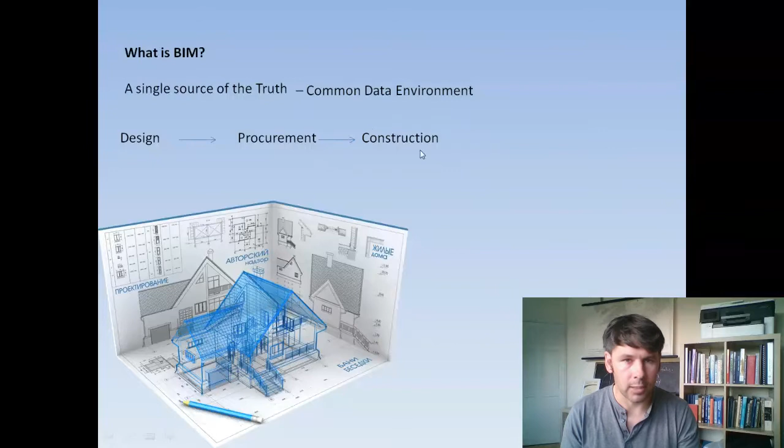But what happens after the building is completed? Ideally you have a rich BIM with all the building-related data, be it drawings, models, updated models, as-builts, all the equipment manufacturing information. So what happens after it? How do you utilize such a data-rich tool?

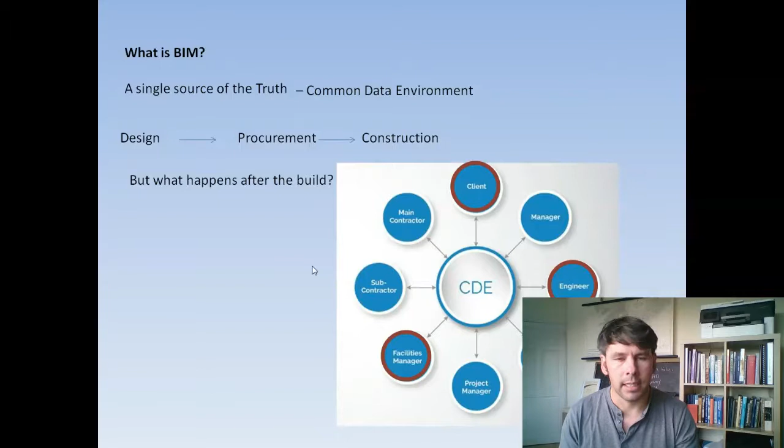I think that question is important for facility managers, clients, engineers, main contractors, subcontractors, project managers, suppliers. Theoretically, at the end of the building, even the end of the defects period, they kind of fade to the background unless they're undertaking new projects related to the asset.

As well as defining what BIM is, it's important to go through the different levels before we get into the meat of the presentation. BIM level 0 is probably what the construction industry has been for the last 20, 25 years: two-dimensional CAD drawings, an unmanaged process. By unmanaged I mean it was quite linear: a client specified what they wanted, a designer or architect undertook drawings and specifications to meet those requirements, and that was sent out to tender, whereby a contractor built those with very little collaboration in between phases.

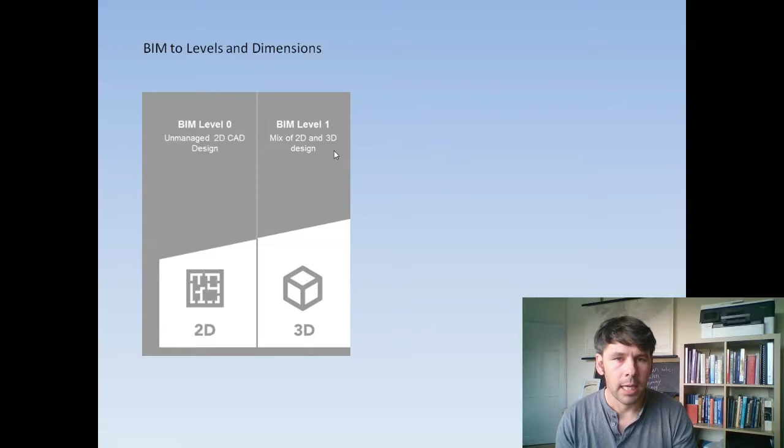BIM level 1 is still probably at that level in terms of collaboration—there isn't much, maybe between the codes in terms of electrical and mechanical 3D design. In the Irish context, we're probably between BIM level 1 and BIM level 2 at the moment.

BIM level 2 is a mix of 2D and 3D design, going into the 3D element of design and models, COBie, building information, and building data. But the key difference is collaboration. There's a common data environment, the first mention of that, and the single source of truth is manifested in this common data environment, whereby the different designers and architects produce their models or data and contribute to a federated model.

A federated model is made up of all these different entities, but it is federated rather than being a unified model. So it's the first step on the road to the truth, I guess.

BIM level 2 is now mandated in all UK government projects above a certain value, as well as several other European countries. We're not there yet in Irish terms, in terms of public projects.

The dimensions related to BIM level 2 are programming, or time, the fourth dimension—how the project develops over time and is scheduled—and also the fifth dimension, which is cost. This is where quantity surveyors come into play, where their skills are utilized in BIM, how elements and different ways of constructing things are priced into the BIM, and how different elements and materials are used.

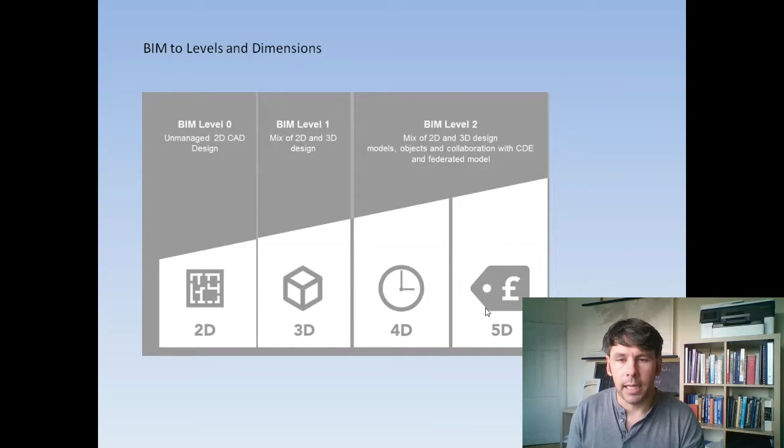BIM level 3, whereby the goal is that in the next 5 or 10 years that's where we'll be operating in the industry, utilizing transactable, interoperable data—meaning everybody is working off the same data types and data formats.

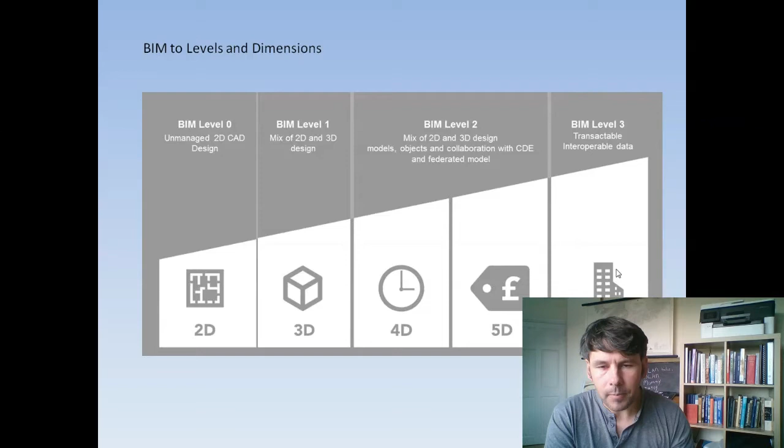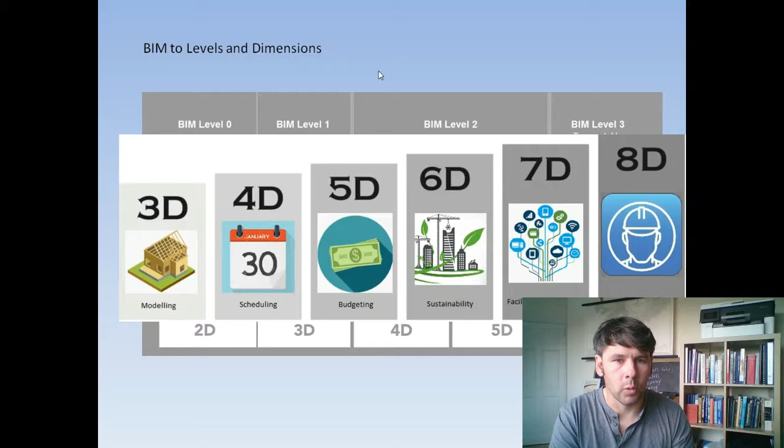IFC, for instance, you're probably familiar with the IFC data set. In terms of dimensions, that goes to 6, 7, and 8D, and they have different definitions. It's generally accepted that 7D is facility management, 6D is sustainability, and 8D is safety, but depending on the institute and location, those dimensions are defined differently. For now, 3D, 4D, and 5D are quite clearly defined, since a lot of jurisdictions are working at BIM level 2 and up to 5D, which is fair to say is where BIM level 2 is at the moment.

So in terms of BIM level 3 and 6D, 7D, etc., what I'm going to focus on is facility management. How can we utilize a rich BIM in facility management once the building is built? This comes into play in terms of repair and renovation, space management and occupant comfort, and operation and maintenance of the building, how it's operated, and how that feeds into sustainability goals.

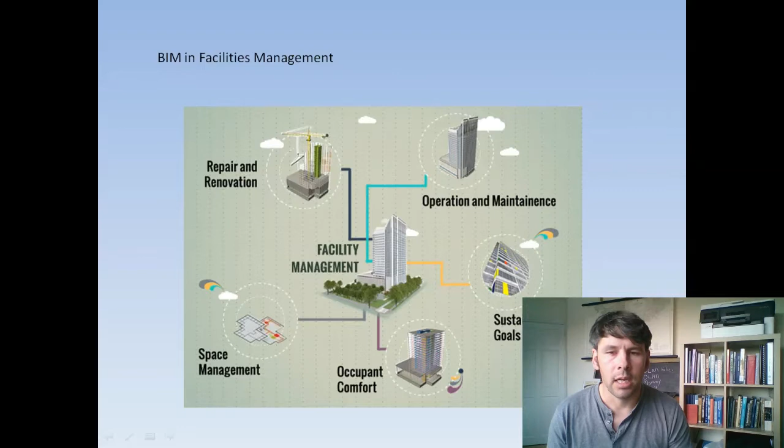So how do you manage waste? How do you manage energy? And how do you reduce your carbon footprint ultimately? A couple of case studies I'm going to look at involve structural health monitoring, building environmental monitoring, and also live sensor integration or live data uploading in the BIM.

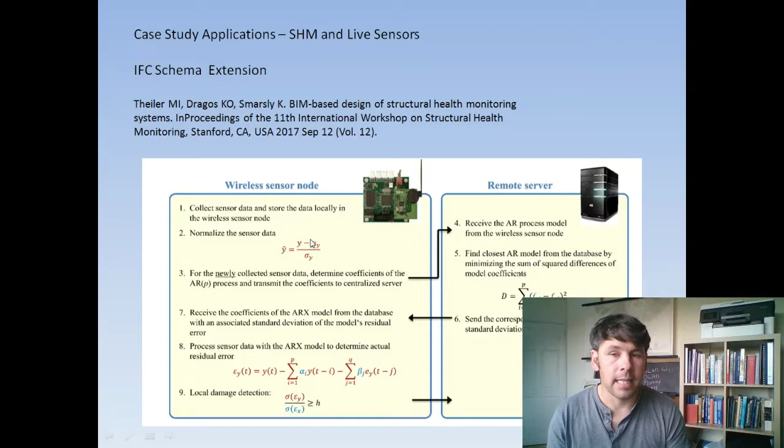The first study I'm going to look at looks quite basic on the outset, but it's quite a clever study. What the researchers did is they created a scale model building, and they inserted wireless sensor nodes, which are accelerometers. They created an algorithm to detect local damage from these sensors based on vibrations, and they fed that data into a remote server wirelessly.

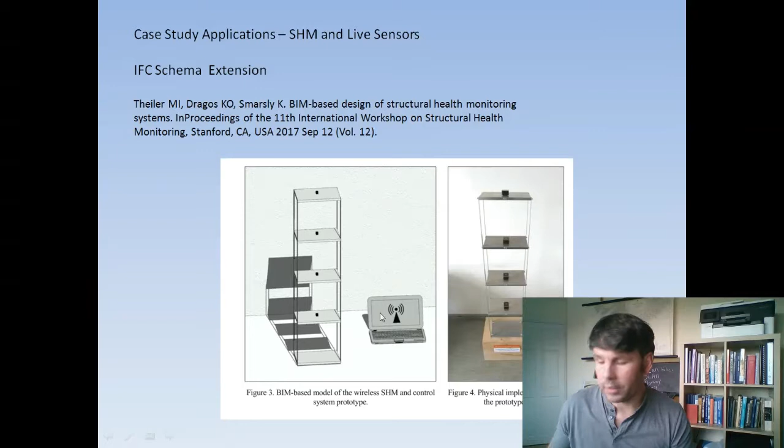But the key thing and the theory they tested was, could this be undertaken using the existing IFC schema? So in a BIM level 3 environment, can this be done in an interoperable manner? They found they had to make amendments to the IFC schema, extensions as they call it. So that's quite a simple premise. It's important for the industry to move forward that that type of work is being done in the semantics.

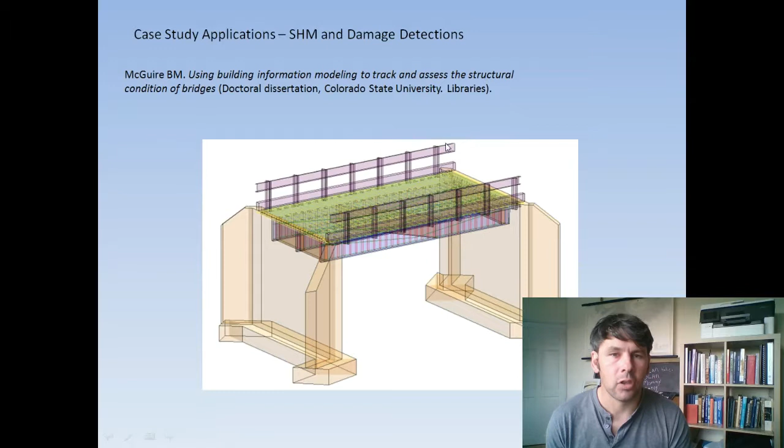In a more tangible way, applications of BIM in the facilities management or the structural health monitoring area. Recent work has been looking at a concrete bridge and integrating the structural health monitoring, looking at how to represent spalling of that asset on a BIM.

Well, quite a simple application. It's very useful and very worthwhile, because generally with these bridges, they get inspected every 5 or 10 years, and if this data is being collated in such a visual manner, it's very easy to identify errors and structural integrity. So also as part of that work, they looked at spalling in girders.

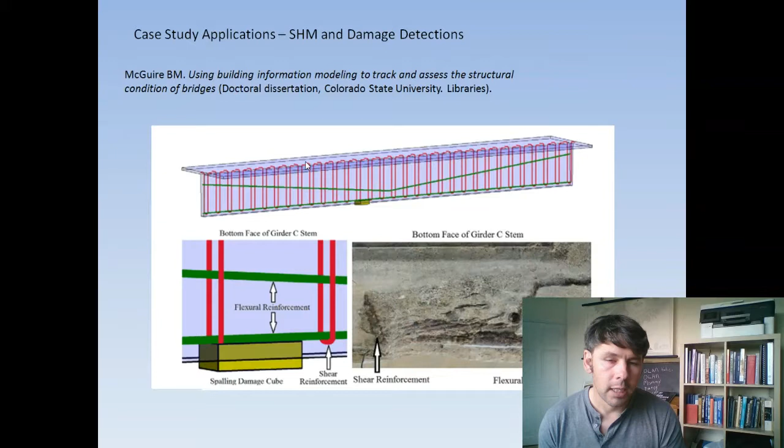And how they could impact flexural reinforcement in the girders. So here you can see different types of flexural reinforcement and shear reinforcement being damaged. That's all collated in a BIM environment. So it's making use of a BIM after the construction stage.

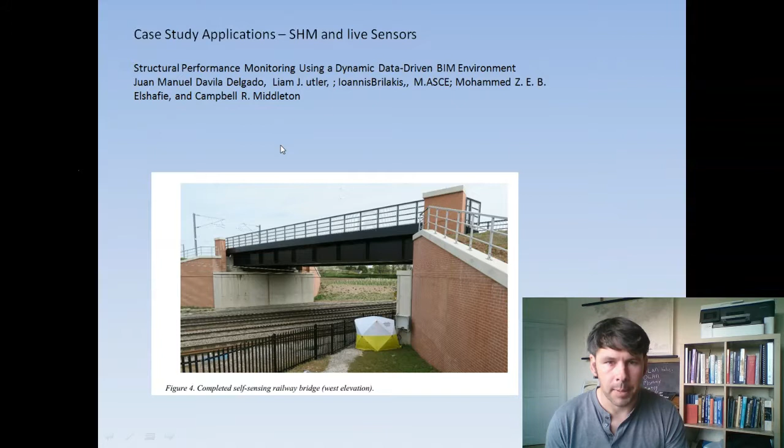Taking that one step further is to integrate live data into that, or live sensor data into such a BIM. So this is a steel railway, self-sensing railway bridge, as it's called, and in reality, several strain gauges were inserted into the bridge girder beams, and these were represented virtually in a BIM environment and given all their structural parameters as well as their geometric parameters, but also the data collection parameters.

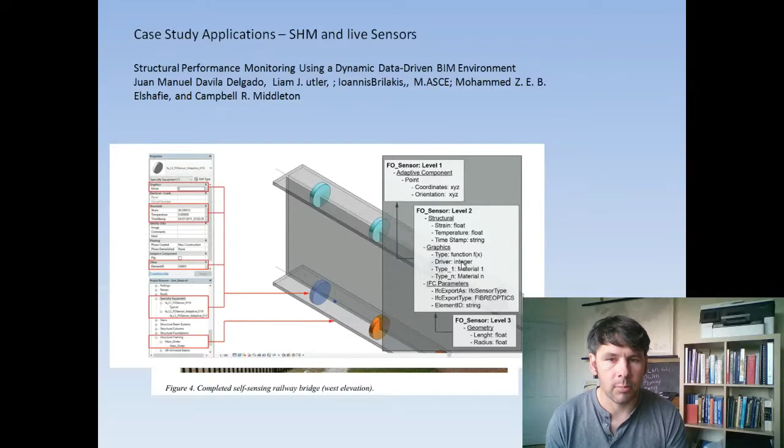And this was then fed into a BIM in real time using visual programming, which we'll talk about a little later. And they developed a color coding system to identify strain, so this is levels of strain. And you can see that this is real-time updated in this bridge, the level of strain.

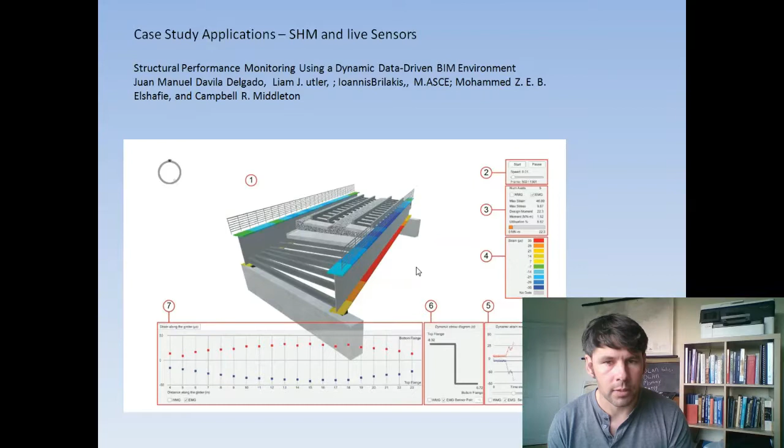Which is quite a useful tool for anyone operating loads, or if these are taking freight, what type of freight loads and what impact that has on that bridge or that asset. So it helps with the long-term maintenance as well as the structural health monitoring. A very smart, intelligent use of BIM after or post-construction.

So I've mentioned graphical programming and how that's undertaken. Dynamo is what I use, and it's one of the open source packages that's used with Revit. What it actually is, is a graphical programming interface. It enables automation, integration, and processing of data in the BIM environment.

And in our case, the data is sensor-driven data. So the data we collect from sensors, we use Dynamo then to process it and integrate it within a BIM environment and to visualize it. It's quite easy to use from an engineer's point of view.

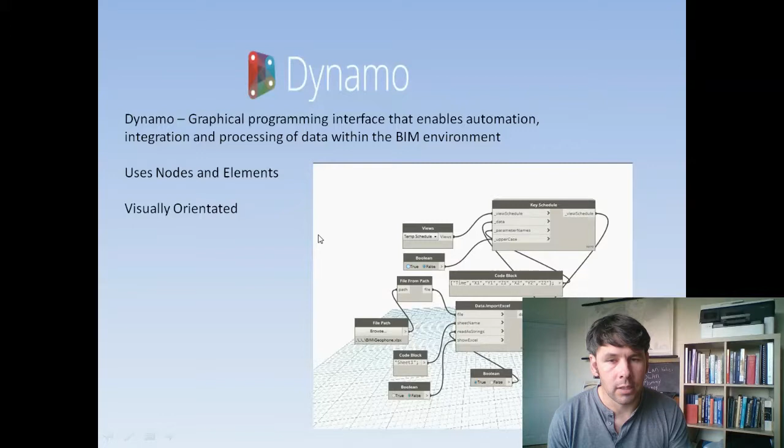It's visually orientated, so it's made up of a series of nodes and elements and different code blocks with different functionalities, and you essentially have your functionalities and you link them to your other functionality. So it's a very nice way of using graphical programming rather than writing reams and reams of code.

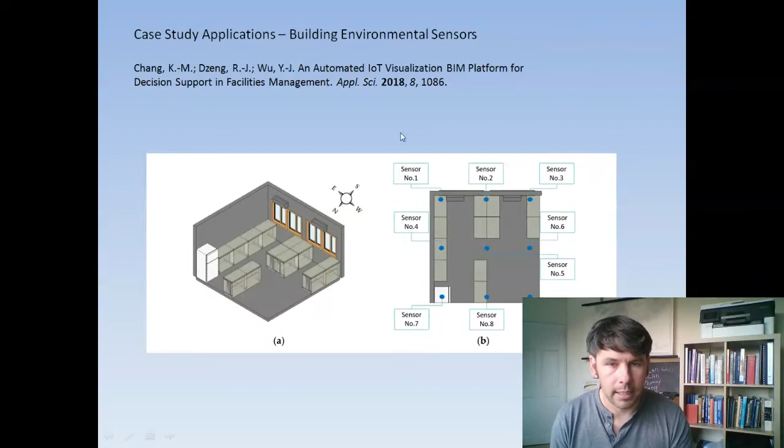So one nice use of sensors and BIM is in building environmental monitoring. In this case study, the researchers created a BIM of a classroom, and they inserted several sensors. These are sensors down here: temperature, humidity, and CO2.

So they actually have 4 campus buildings. This is a university, and they undertook the trial in one of the rooms with a view to extending it. So what they did was they created a digital twin, or a virtual representation of the sensors, and then using Dynamo and another tool called Firefly, which is another visual programming tool, they created 3 algorithms to identify comfort, energy saving, and how the building or the room met the WELL standard.

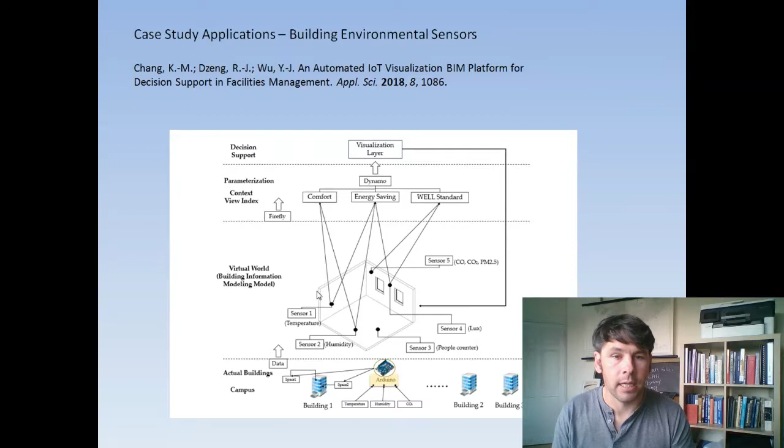They then created a visualization layer to visualize the results and fed this back into the Revit model so it could be visualized. In essence, what they did is define a zone where body temperature sensitive range, and they used their sensors to identify when that could be achieved.

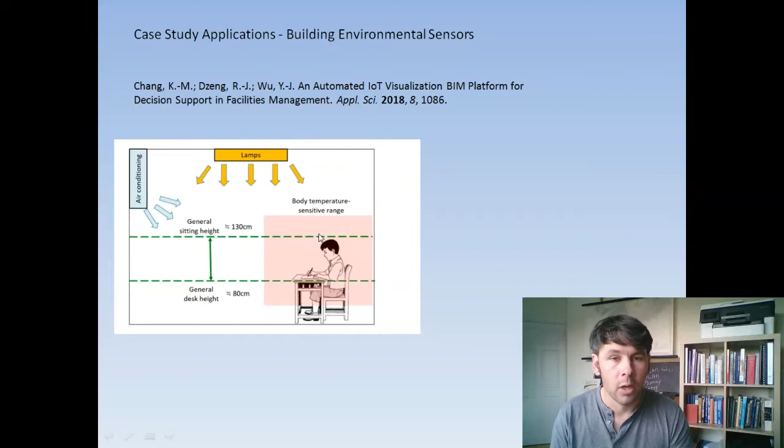The ultimate goal of this project was how to utilize open windows and air conditioning, and ultimately reduce energy consumption. So they represented this as the room in the BIM, the same room represented at different times: from 5 o'clock when the window was open, moving along to when the window was closed at 6 o'clock, and then to when the actual air conditioning kicked on. You can see the different levels of temperature in the room and humidity.

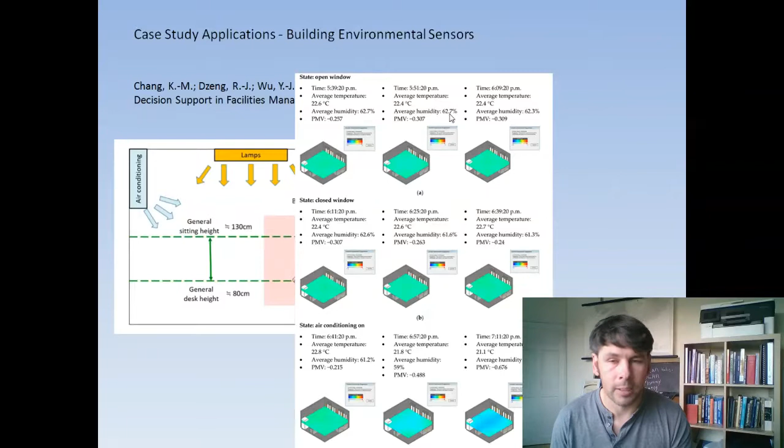This is then fed into a decision support system, which tells the air conditioning to turn on or the windows to open or close. So a very smart tool integrated in the BIM using live sensor data. And this is how they achieved it, using Dynamo.

They created a code block to import the live sensor data. This was then processed to visualize both temperature and humidity, and integrated into the BIM to visualize in the actual room how it would look. From there, that data was taken into the decision model about whether to open a window, close a window, or turn on the air conditioning. This was then fed back through the loop.

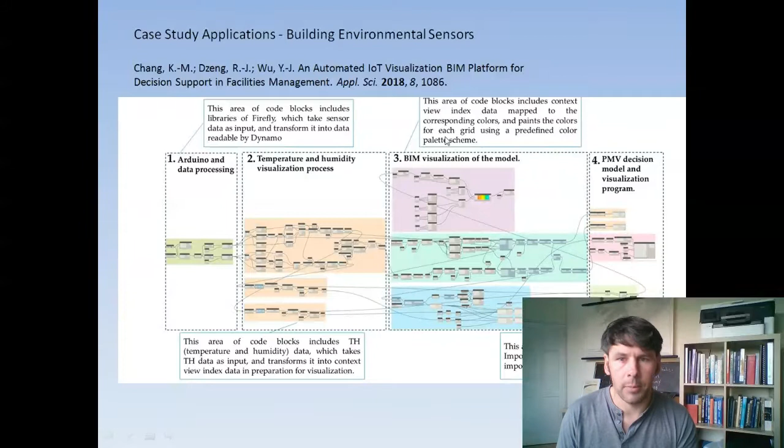So while it looks very complex, if you break it up into its constituent blocks, it's quite an easy logic to follow.

This brings me to my own case study, which is the Kish Lighthouse, an area I've been studying for the last couple of years. It came about when a building information model, or Revit model, was developed to undertake a lot of remedial works about 4 years ago. Since then, we've expanded that Revit model into a level 2 and possibly at this stage a level 3 BIM. In terms of dimensions, not particularly with interoperable data, because we are quite refined in the data we're using.

The Kish Lighthouse itself is about 11 kilometres offshore of Dun Laoghaire in Dublin. It takes quite a lot of punishment from the Irish Sea in the wintertime. The Kish Lighthouse is a quite unique build - it was a telescopic tower build. Initially a foundation caisson was built, a reinforced concrete foundation.

Within that, a tower unit was constructed, which hosts 7 or 11 levels, living quarters and operational quarters. Once the tower and the caisson were built, they were floated in one unit and shipped out to the site of the Kish Bank. It was then sunk into place, and from there the tower unit was actually floated from within the caisson and grouted into place, and this area was backfilled with sand, creating a composite structure, which is important for later on.

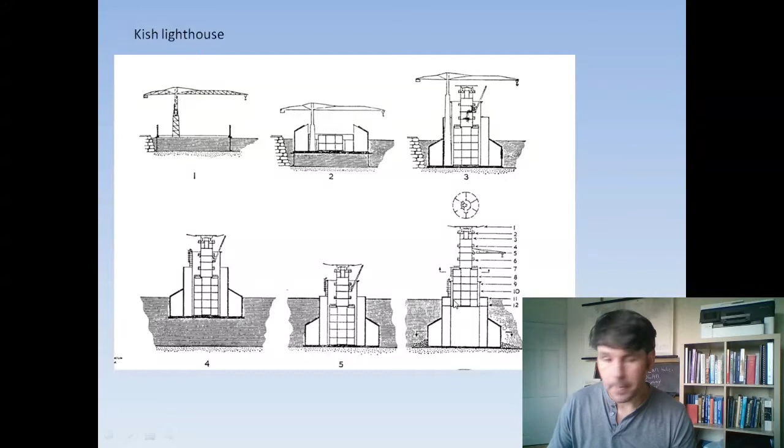One of the first activities we did with the BIM to enhance the existing model was to document the various inspection reports, which span from the 1960s to the 2010s - I think 2015 was the latest inspection report. We collated all the damage detection and gave it a color coding based on severity, and also a shape based on the type of damage incurred.

What we actually found from visualizing and putting all this into the BIM was that there was quite a concentration of damage in an area we didn't expect - above the water line and to the lee, the least exposed area. There's quite a collection of damage in this area, which was an interesting finding. We're still collating the damage reports and visualizing it and looking for ways to analyze that.

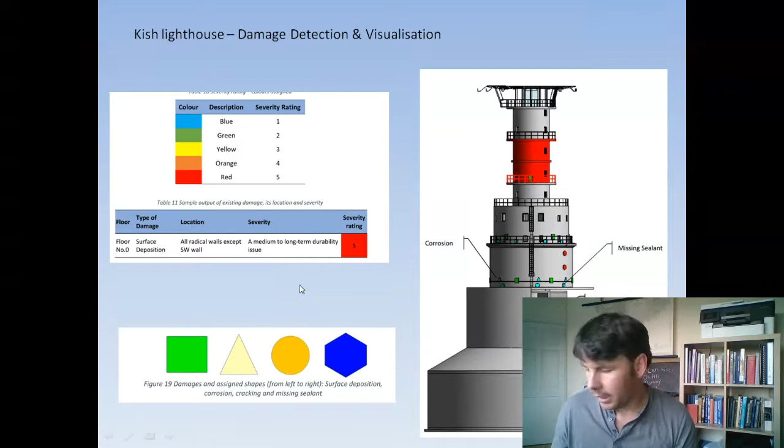Allied to that, the more important work we're doing is looking at the structural issues in the Kish - there are two primary structural issues. There's a stability issue whereby it has been reported in several storms, when the lighthouse was attended, that the tower rocked. What we want to establish first and foremost is whether the tower is rocking as a whole structure from base to top, or if there is differential rocking between the tower and the basement section, this annulus - i.e. is the annulus failing, which would be quite a serious issue.

A slightly interrelated issue is a pressure signal. There's quite a large water pressure build-up underneath the caisson, which is theoretically sealed, so should not have any pressure build-up - it should just be residual water. This pressure signal, as I'll show later, is showing a tidal signal, which is quite a worrying phenomenon. So given that we had a BIM and an interest in sensors, we decided to place a lot of sensors on the building, as well as link external sensors such as wave and tidal sensors that are not necessarily on the building but related to it in a BIM environment.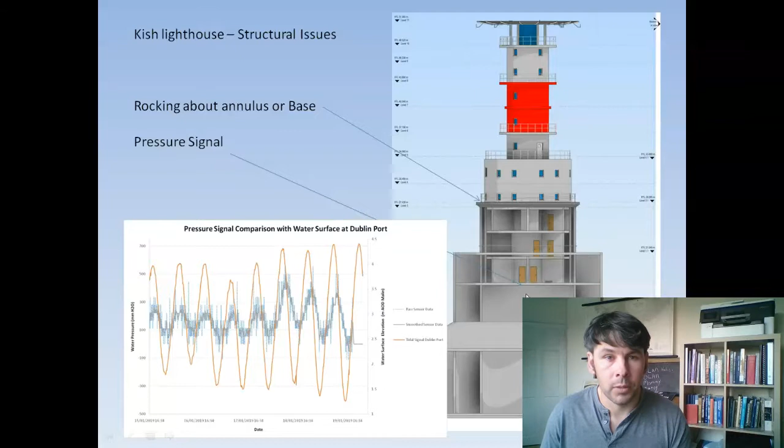We've ended up with a range of external sensors: a Dublin Bay buoy, a LiDAR sensor, and an in-situ wave gauge which we're hoping to install this year to give real-time data at the structure. We've installed a pressure sensor, and also accelerometers and geophones in anticipation of a winter where we should see some rocking, hopefully.

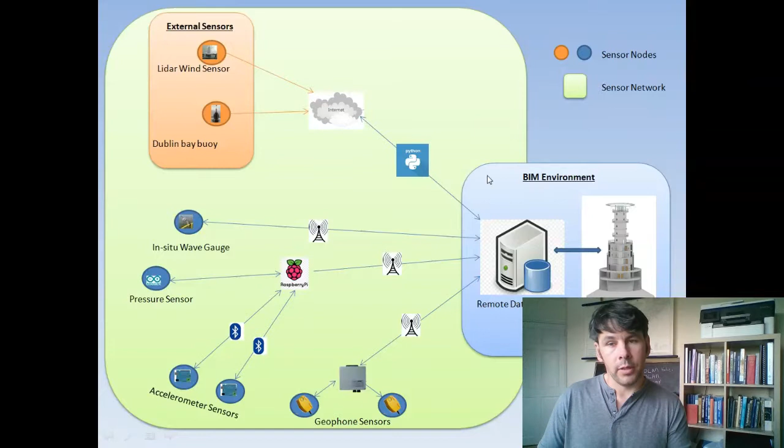All the sensor data is collated wirelessly through the internet into a remote database within our BIM environment, and it's where our Dynamo script starts to act. So that's my cue to show you the actual BIM.

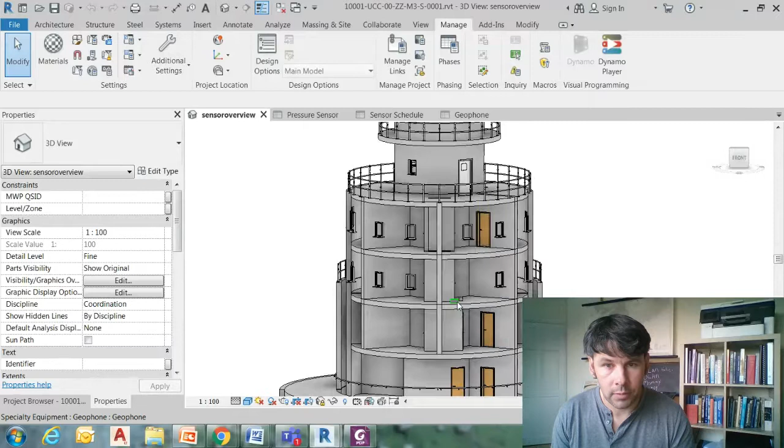This is the model we have created. I've taken out the walls just to show you the sensors for the time being. Here is a geophone sensor that we've modeled. We're just modeling with cuboids, but what you'll see is this area where we have live data coming in, based on live data, so we have accelerations coming into the model.

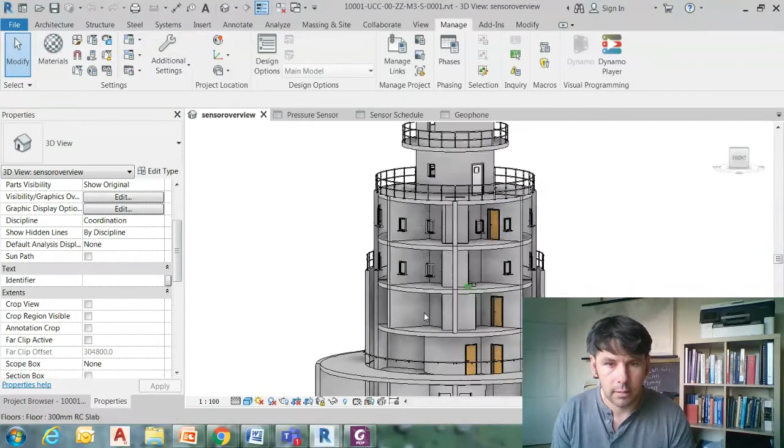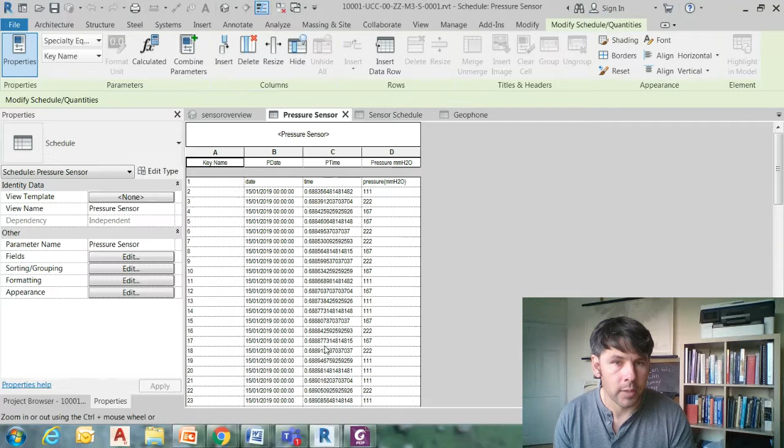Likewise, we have our pressure sensor modeled - it's a little bit slow. We have a pressure sensor modeled here, and we can bring in live pressure and date-stamp it. That's good for visualization, but for the BIM, what we really want is to collect the data in the environment. So within the BIM we have time series of the pressure and the geophone, and we also have other sensors linked up - I'm just showing these for brevity.

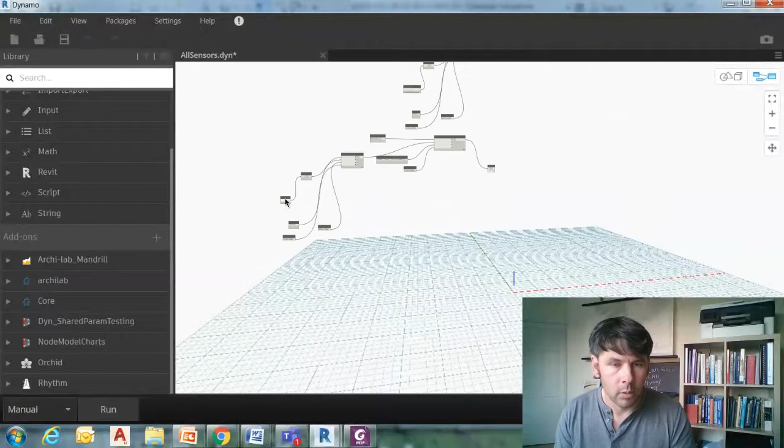That's where we are with it, and how we actually bring live sensor data into the BIM is through Dynamo. This is the Dynamo script I'm using, that I've developed - I'm by no means a coding expert, in fact I'm far from it, but a couple of days using Dynamo and it's quite intuitive. You set a file path that reads off the data files downloaded from our central server, where all the sensors upload data in real time, and then it goes through a series of code blocks to get out and be displayed as scheduled.

The plan for the next installment of this research is to find ways of visualizing the data. We're collecting and scheduling it at the moment, but the next jump is how to visualize it. Like they did in that case study for the temperatures in the room, we want to visualize the data and how it interacts with the sensors. That's our next step.

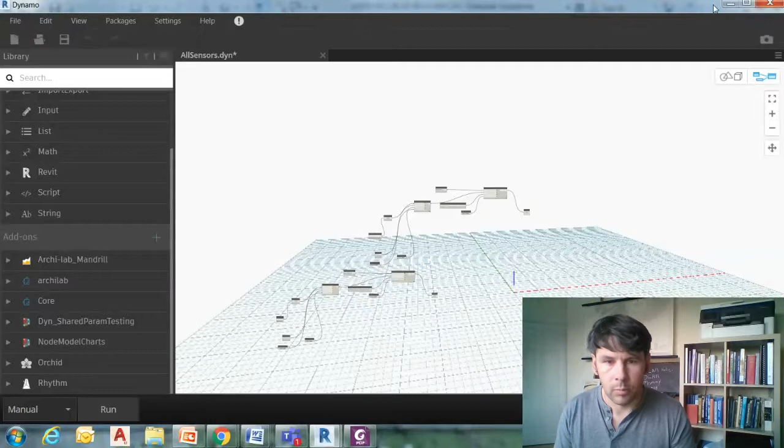Just to wrap up, another use we found for our BIM model - probably unique to our own facility - is that we do a lot of wave tank testing. Given there were discrepancies about the stability of the tower, from the initial design report in 1963, to stability reports in the 80s, to a finite element analysis model in 2015, they all had different factors of stability. So we decided to examine the stability ourselves by developing scale models.

We actually 3D printed physical scale models from the BIM. We trialed it at a 1 to 200 scale first, and subsequently developed a 1 in 60th scale model of the actual lighthouse using the BIM. We're hoping to test that in our wave tank over the coming months, establish the factor of safety for the scale model, and feed that back into the BIM model as another element of added value.

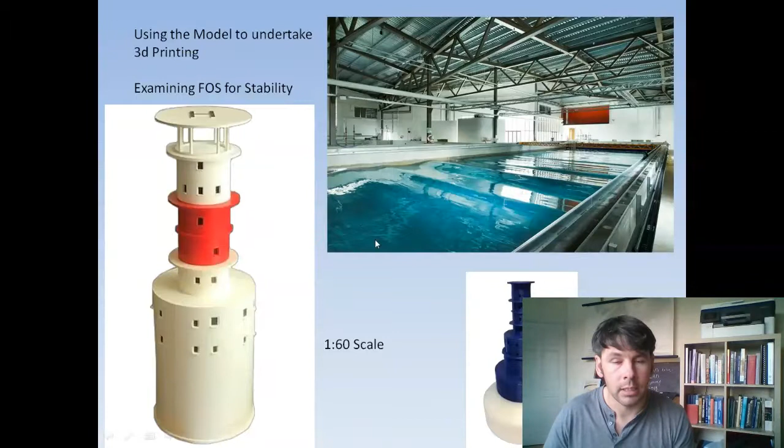In conclusion, I hope I've shown you where BIM will go in BIM level 3 in the next 5 to 10 years - what we're looking at after the building has been completed, how we can increase the value and capability of BIM using tools such as visual programming and wireless sensors and live data. One thing I didn't touch on is the Internet of Things, and I think the Internet of Things and BIM will coalesce in a big way in the next 5 to 10 years.